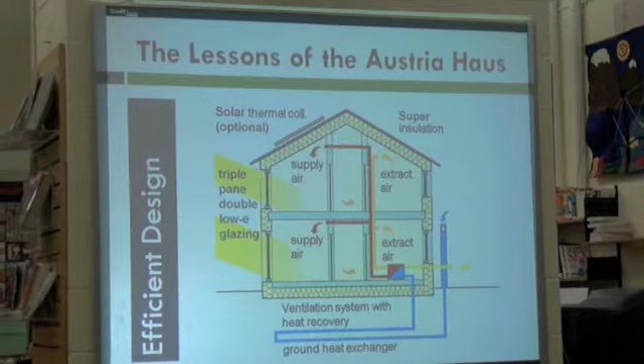As Guido mentioned, the PassiveHouse concept was born in Canada, and the basics behind it aren't anything new to Canadians. If you speak to any builders out there, they will know about compact efficient design, passive heating and cooling, super insulation, air tightness, and using really good windows. What the PassiveHouse design, or standard, does is require you to use all of this information in a holistic approach, and use it fully, as opposed to only partially.

And they have developed a planning software that allows you to design your house and very accurately determine the amount of energy that your house will consume.

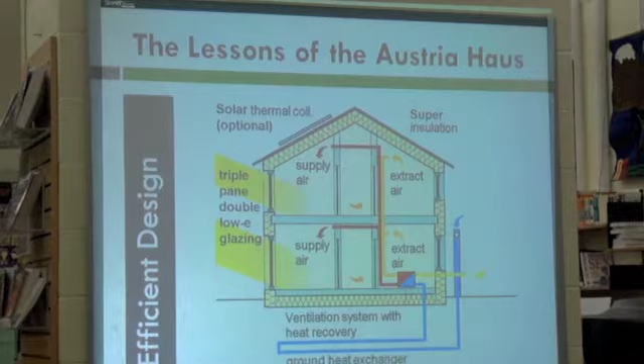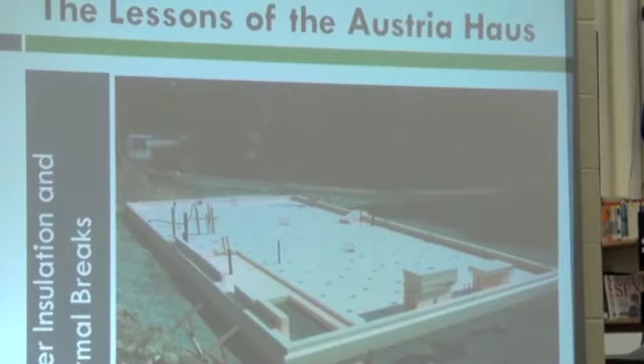The things that we learned from the Austria House as builders is that super insulation and thermal bridge-free construction is very important. This picture here is showing the expanded polystyrene insulation that's below the concrete slab, and everything was thermally broken.

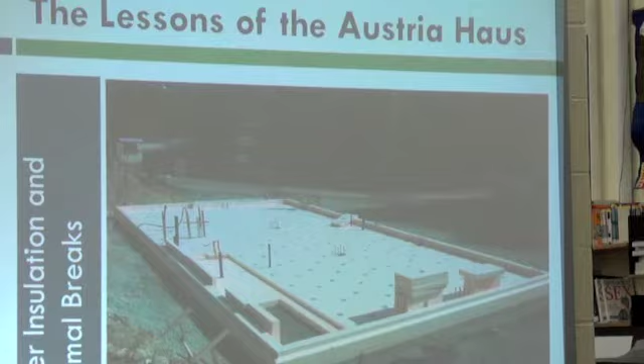The next is the windows. The Austria House taught us that it is more than just triple pane, and it introduced us to a whole window market in Europe that was achieving performance standards unheard of in Canada at that time.

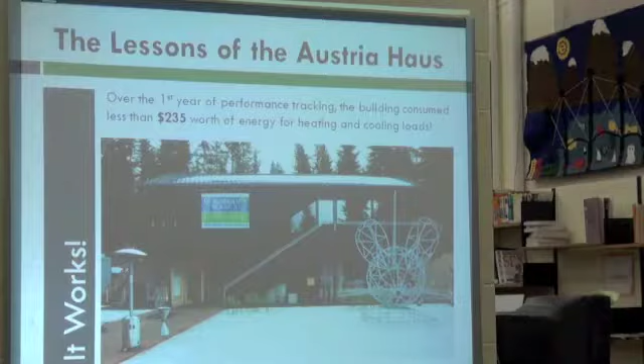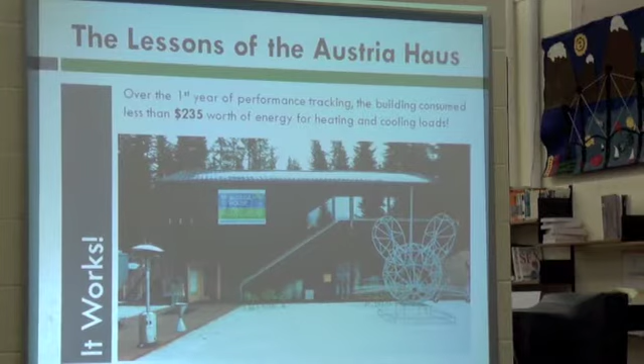And that it works. As everyone has mentioned, this dramatically reduces the energy demands for heating and cooling. The PassiveHouse has been monitoring energy consumption for the last year and a half, and for the first year, this 2,700 square foot public use building, where the door is constantly opening and closing throughout the winter and summer months, the municipality had to spend $235 for heating and cooling for an entire year.

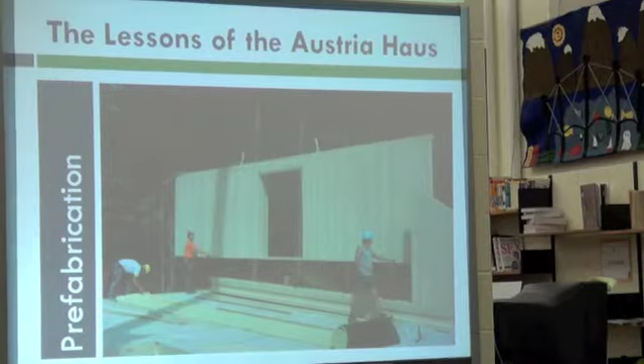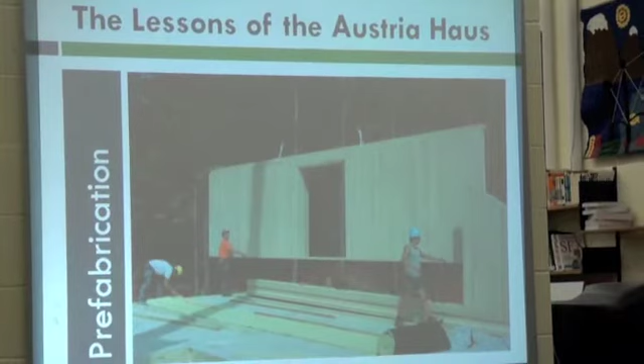The other thing that we took away from the Austria House is that it makes sense to prefabricate when building to this standard. As I mentioned, everything for the Austria House was prefabricated in Europe and shipped over. Prefabrication allows you to control your building environment, construct on a horizontal surface, and more easily gain efficiencies in your envelope by not building in the rain, building with square edges, and all that.

The other thing that prefabrication gives you is a very quick assembly time. So you're out of the weather within 3 to 7 days on average, making it a very efficient and popular construction method for challenging work sites, weather conditions like down in Vancouver, or high efficiency buildings.

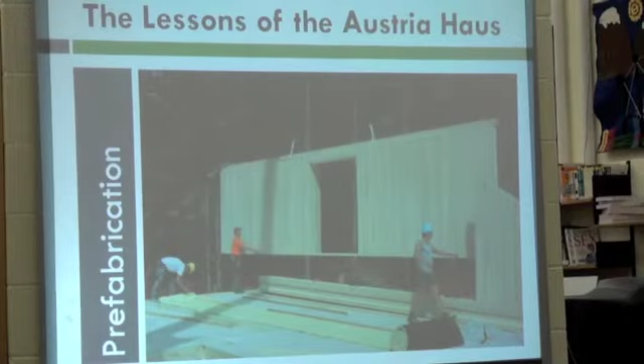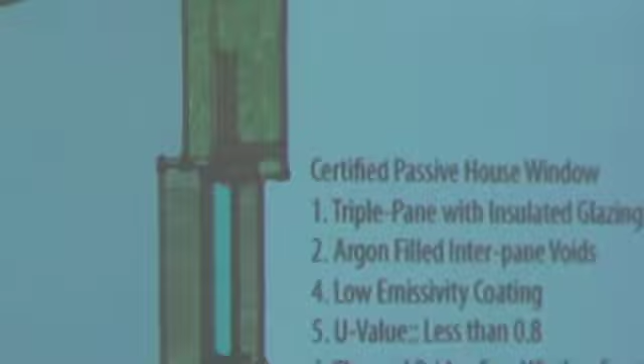The one thing that the PassiveHouse standard does not tell you is how to build them. It tells you what you need to achieve, and it sets these thresholds out, but you can achieve it in a million different ways.

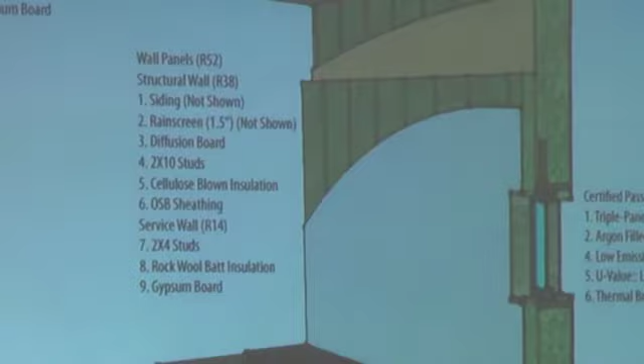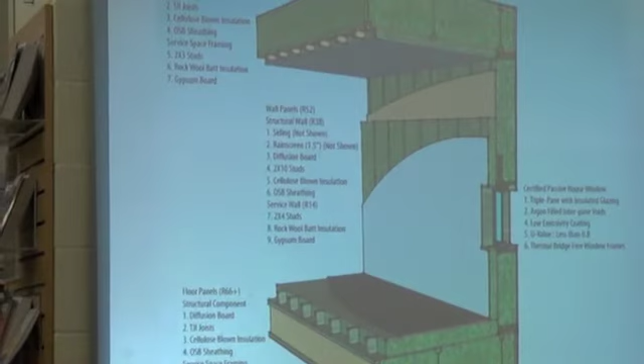When we were trying to design our system, we wanted to use as many locally available, sustainable, low VOC products as possible. We are wood guys, so our system is focused on wood and wood byproducts. Wood is BC and Canada's most sustainable, renewable building product.

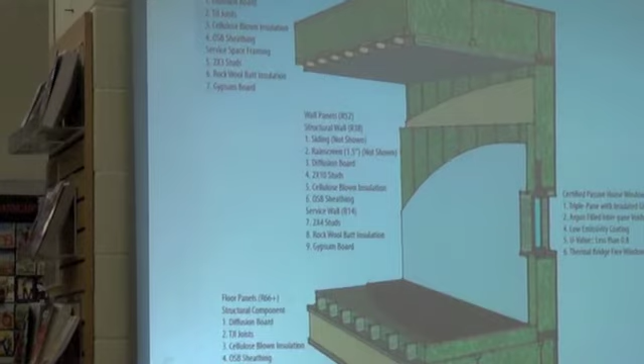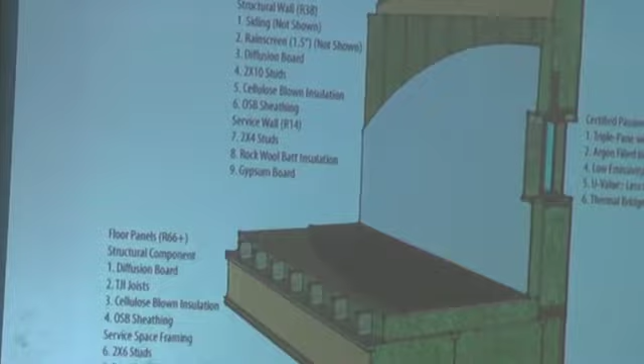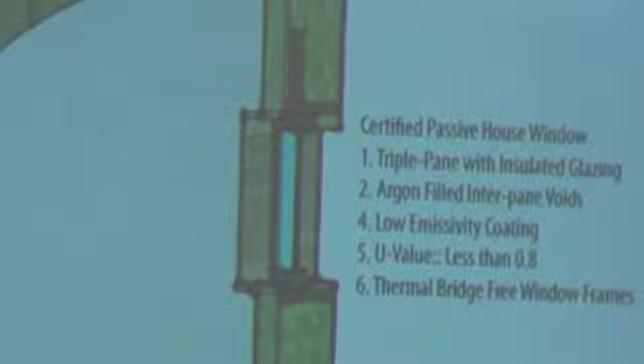The other thing that we wanted to create was a healthy system. So, as I mentioned, low VOCs — we shied away from using petrochemical-based materials, and we also created a system that was airtight, but still vapor diffusion open to the exterior, essentially functioning like a Gore-Tex jacket would.

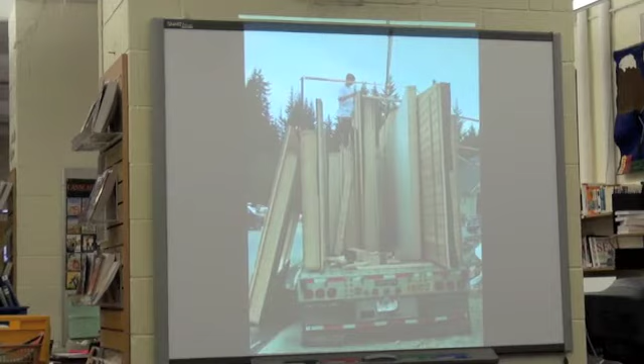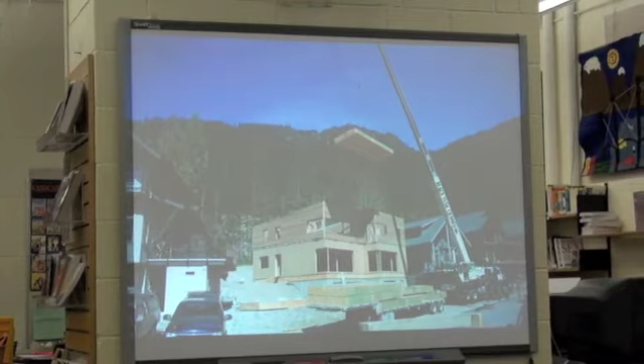These are the panels being shipped to site, being put into place, a little bit like a puzzle, being put into place again. To create and maintain that airtight barrier, it's very important that you use airtight tapes to tape off all of your seams within the wall and the connections within the panels.